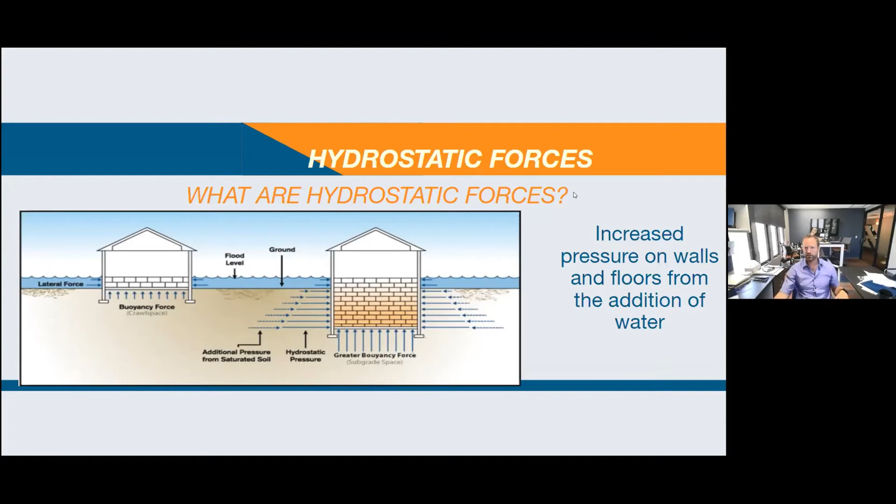All right. Another part of hydrostatic force is you've got the buoyant part of those hydrostatic forces. Buoyancy is simple. Wood floats, right? You throw wood in water, it floats. A lot of building items float. Slab doesn't float, but you get into these pier and beam homes, these elevated homes, their foundation systems are wood, right? If they're not attached properly, and they're older, hurricane straps and all those things are rusted out, who knows? You can easily have buoyancy from up underneath.

That buoyancy can create the displacement of the property. It can lift it, reset it back down. It can mess it up from one side to the other side. But that is an aspect of hydrostatic, because it's just the natural buoyancy of an object to float when it gets in that water. So again, you have a long-standing lake effect, ponding type effect, flood event that's acting on

an older home, say it's built in the 80s, and it's a pier and beam, it sits there for a lot longer. That's going to have a lot more tendency to potentially raise up, potentially come off of its foundation, just depending on how it's constructed.

But buoyant forces are the vertical pressures applied to the structure due to the vertical water pressures. Again, vertical water pressures coming up from underneath, and it occurs when the weight of the displaced water immersing the structure is greater or equivalent to the weight of the structure being displaced. And a lot of that has to do with how buoyant the actual object is. There's certain objects that are more buoyant than others. Go ahead and go to the next slide.

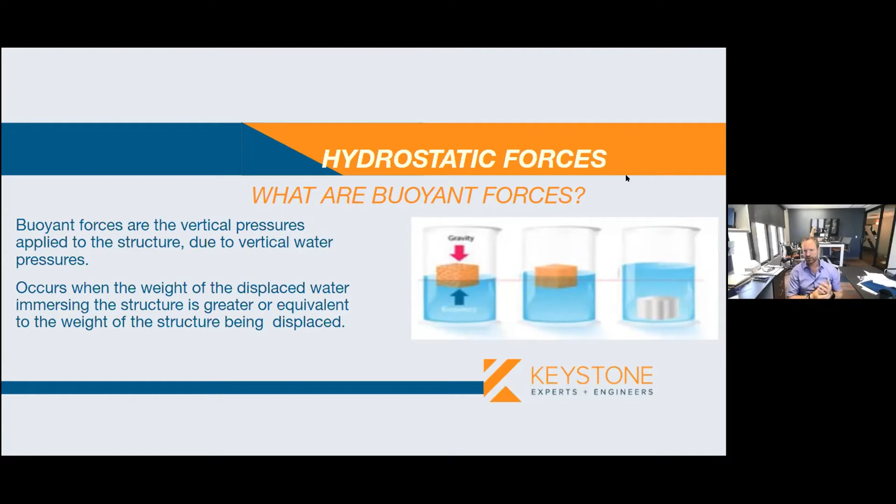So then you get into how do buoyant forces affect structures. Kind of talked about the raising houses. Well, one of the most common things you'll see is in pools. If a pool is not full and you have a flood event in the area, that pool can and will come right up out of the ground. You see this in freezing actually as well, in areas where there's a big freeze-thaw event. People drain their pool for the winter, not knowing that they're actually supposed to keep water in it all winter. That pool will come up out of the ground.

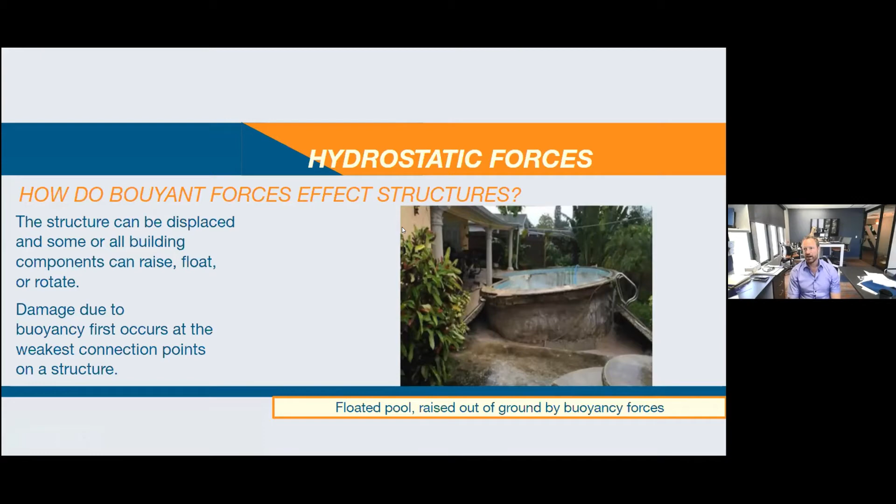We've had several assignments like that, just trying to determine the cause and the origin of, hey, why is this pool up out of the ground? But in a flood event like this, you get a big one. That pool is a big, huge fishbowl, and it's not full of water. Guess what? That thing's going to go up. But that's the same principle of what it can do to a house if the house isn't constructed and tied down properly. Next.

Little simple table here. What is water pressure? Hey, in a typical dry event, if you look down on the bottom left, you've got the water table, which is down there. And then all you have exerting on the structure is earth pressure. That's it. And you're going to have typical expansion, contraction of soils, depending on what area of the country you are in. That can be really bad to very minimal, depending on the quality of the soil, right?

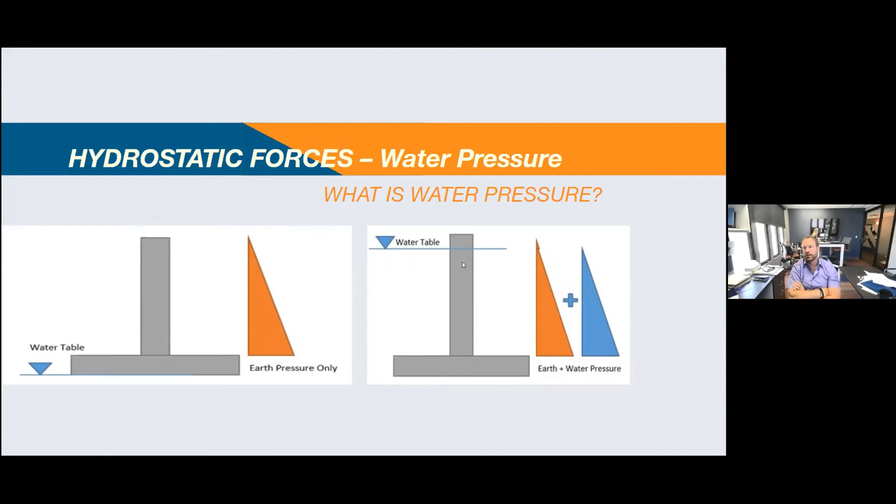And then now all of a sudden you've got this raised water table. Well, not only is the earth pressure acting on it, which is now increased, now you got the earth plus the water pressure coming on it, which is driving that whole instance up. So you could have a heaved slab in the middle of a house. This is due to that type of hydrostatic pressure acting against the slab underneath, just because you've got the combination of earth and water pressure.

Not all heaved slabs are due to just straight up earth movement or soil expansion. A lot of heaved slabs could easily be due to hydrostatic pressure, but you really got to look at it and look at all the other factors to see, hey, does this add up? Is the slab heaving enough that it adds up, or little? You put it all together, and that's what the brainiacs and the engineers are for.

They put all that stuff together. How does water pressure affect structures? Again, this is pretty common. This is what you're going to see most commonly in an event like this: you're going to have these lateral earth pressures, these lateral water pressures coming at it, and it's going to just buckle that interior wall.

This could be a subgrade thing. You see this a lot in basements. Again, you see it a lot in older homes that were constructed of CMU. They might not have been reinforced. They didn't have the rebar coming down. That's just older construction practices. They weren't designed to withstand the type of lateral pressure coming in on those walls, and so you see this a lot in basements.

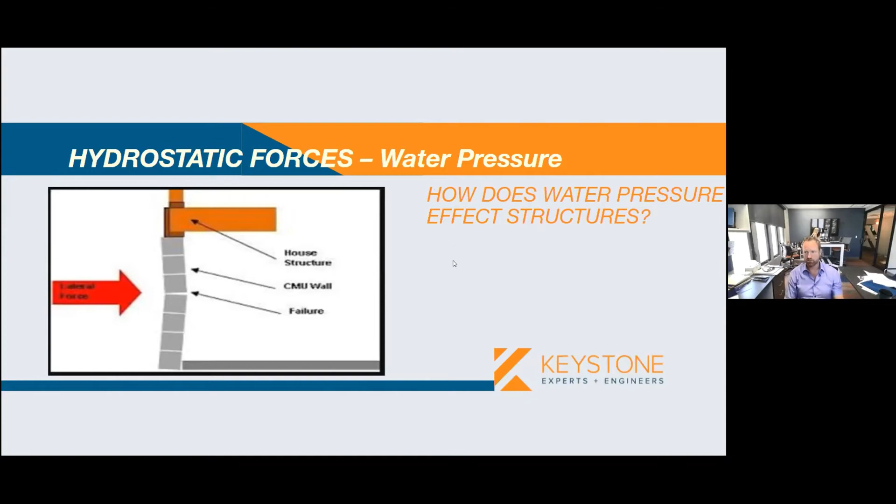You can see it in the upper floors as well. But the most common area is in a basement, because you've got all this earth pressure already acting on it, just naturally. And now all of a sudden you've got all this water, and these walls weren't meant to be retaining walls. They were meant to just hold back the earth. And now you're telling them to retain all this water as well. They buckle under pressure, boom, you're going to start to see those failures. You've seen them all the way blown out to just a simple crack. And I think we've got a couple pictures here that show that next too.

Yeah. So identifying damage: you've got walls bowed or offset inward, diagonal cracks at the wall corners, pumping water at cracks, gaps in the floors. I don't know if you guys have ever been in a flooded home in the basement, or even just a typical slab on grade home. Water is still coming up. You can see it gurgling up through the surface, depending on how quickly you got there. And that's all hydrostatic pressure coming up from the ground and from the sides.

Horizontal cracks in the field of the wall, stains on the walls beneath the cracks, upward heave of the floor slab. All of those are hydrostatic water pressure. Again, this can mess things up. The better you get, the more experience, you can tell what's older, what's newer. We get involved in stuff all the time where, hey, this crack existed before, it was already failing. Well, now you've got this big flood event and it's really failed.

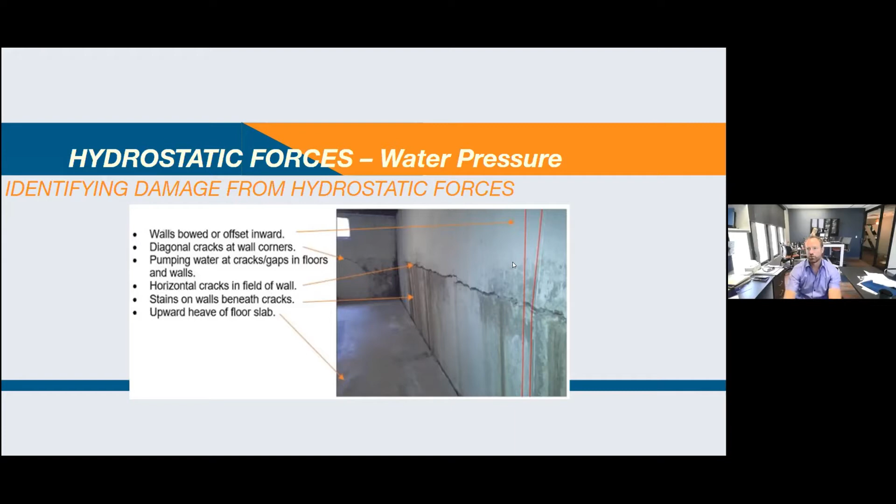And that's where it gets even more complicated, because we have to look at it and say, hey, how much of this is new? How much of this is due to the flood event specifically versus how much of this was pre-existing? So our engineers get involved in that. They can give you a pretty definitive answer on old versus new, so that you can apply the proper coverage, the proper percentage. Go ahead, Jason.

So now getting into hydrodynamic. As discussed, static is standing still, standing water. Hydrodynamic is moving water, flowing water. This is the velocity flows, the wave action, the pressure exerted on all of those things. Hydrodynamic is notoriously a lot more damaging than hydrostatic, depending on the area and the characteristics of the flood event. A river overflowing its banks, flowing really fast: hydrodynamic. A hurricane, massive waves acting against a structure: hydrodynamic. So this can create a lot more damage a lot quicker than hydrostatic does.

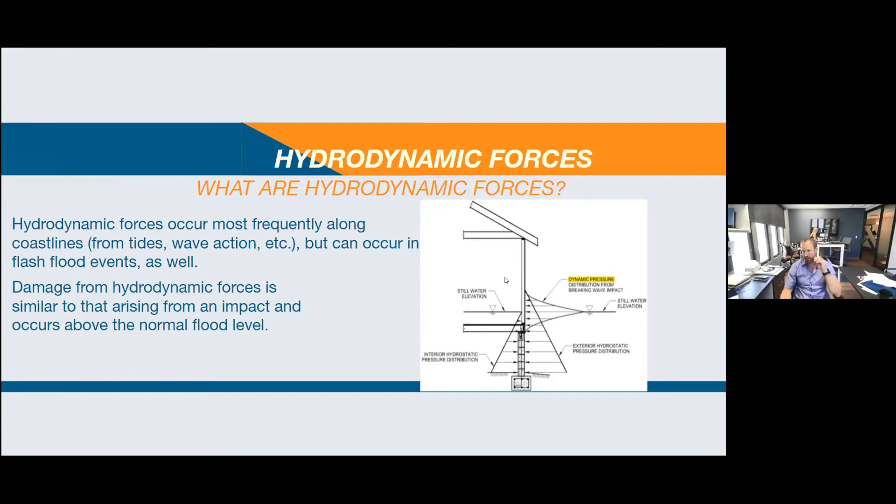I remember we worked a large event out in Boston a few years ago. We were finding ocean spray and flood damage on the third story. This is all from hydrodynamic wave action going up there. The surge was only a few feet, but the dynamic flow of the waves caused everything to go up even higher. So you've got to look at all those different factors.

Velocity flow, again, it's discussed. Velocity flow is a part of this hydrodynamic side. Velocity flow results when moving water impacts a structure. It can cause isolated impact damage from floodborne debris at or near the flood line, unless you got a big boat, and then it can be up on the roof line. Seen that too. But different from damage from hydrodynamic forces, that debris impacts the structure rather than the rapid impact of the water. Again, this is all aspects of the flood though.

Flood brings it, nice big tree, nice big boat, neighboring house, slams on another structure. That's damage from a debris impact from velocity flow. Velocity flow generally occurs during rapid flood events, flash floods, not during widespread general flooding, i.e. Hurricane Harvey. We saw very minimal hydrodynamic damage in Hurricane Harvey in Houston, right?

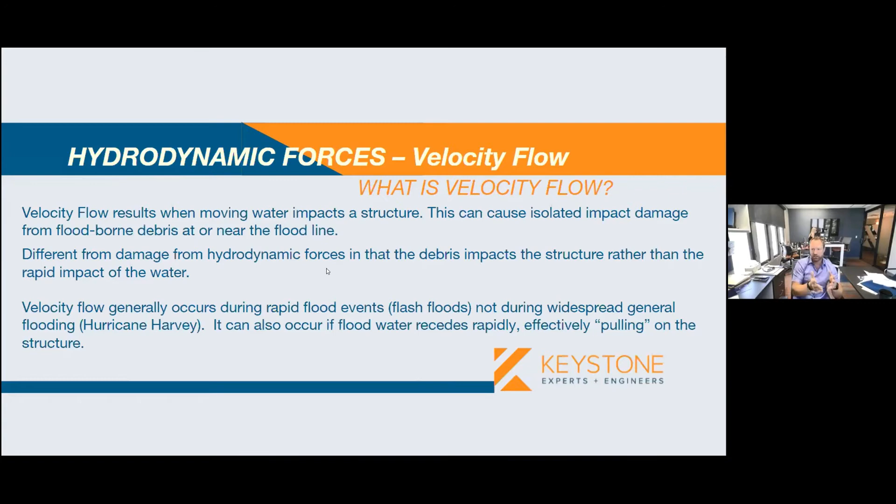Obviously, you had Port Aransas, Rockport, those areas. You had the wave action on the shorelines, undermining pillars and pilings and some slabs and things like that. But it was minimal compared to like a Hurricane Michael. But all that to say, it can also occur if floodwater recedes rapidly. How does velocity flow affect structures?

Well, the most common one is probably scouring and erosion around the foundation system. That water is rushing, it's moving, it's pulling soils with it. It hits something, water's always going to find a way around it. It hits the foundation wall, it hits the walls, it creates the turbulence, it moves the soils out of the way, it continues to erode and degrade the soil, displace the soils underneath the foundation, the pilings. Go stick your feet in the sand and watch a wave come in. That displacement of the sand around your feet is exactly what can happen in these velocity flow types of events.

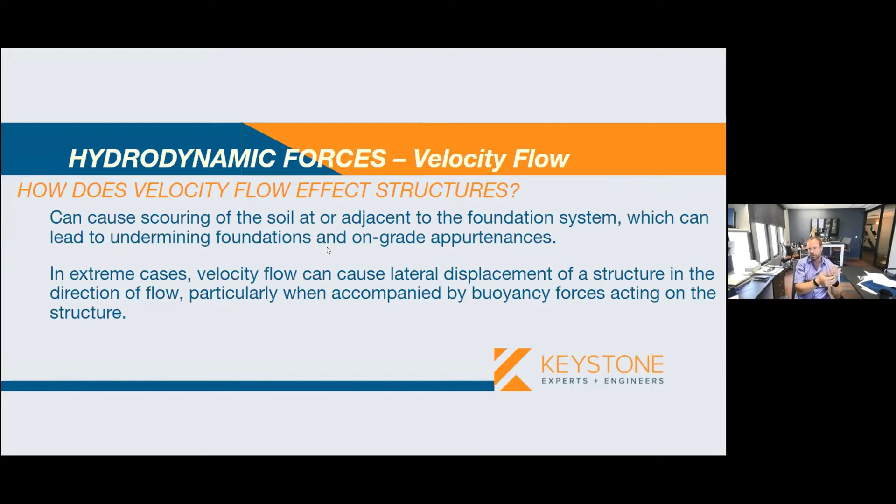In extreme cases, velocity flow can cause lateral displacement of the structure in the direction of flow, particularly when accompanied by buoyancy forces acting on the structure. So you've got this combination of, hey, it's in water, pressure's being upward, and it's being hit from velocity flow to the side. That's kind of like the double whammy. So you've got a really fast flowing flash flood event, or along a river, that's where you see true velocity flow damage, displaced houses, that kind of stuff.

And then obviously you get when the embankments are eroded out on a river, and then you got the houses that are literally just falling into these rivers because the velocity flow eroded so much of that embankment soil. And now these houses are no longer supported and they fall into the streams. So, types of damage from velocity flow, pretty obvious. Foundation piers leaning in one direction.

You got a big old house up here. It's on piers. It's fine if the waves are going underneath the house and the water's going underneath the house. Well, as soon as that water gets as high as the house, and now all of a sudden this house is acting as a retaining system or a big dam, it's not designed for that much water pressure as it gets higher and higher. So you see these houses that are literally racked and leaning off. May have not collapsed yet, may have collapsed, just totally depends. Scour of soil around foundation piers, as I was talking about earlier, racking of structures, and then structure leaning in the direction of the flow.

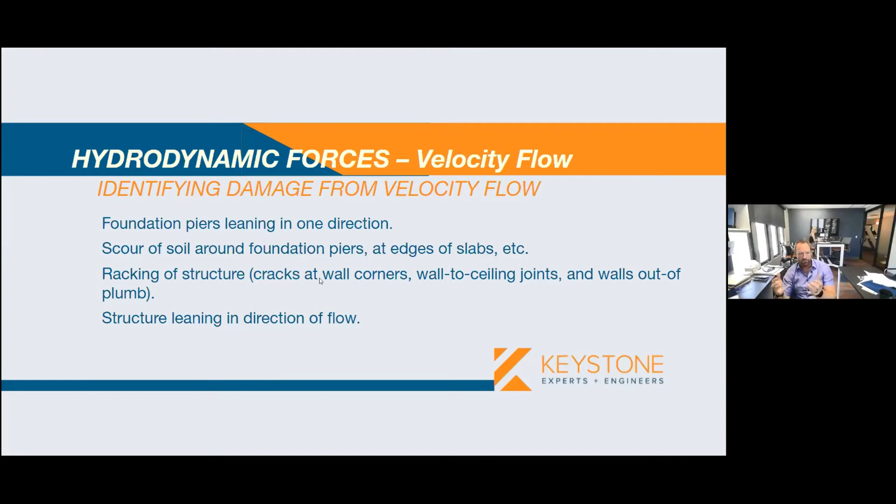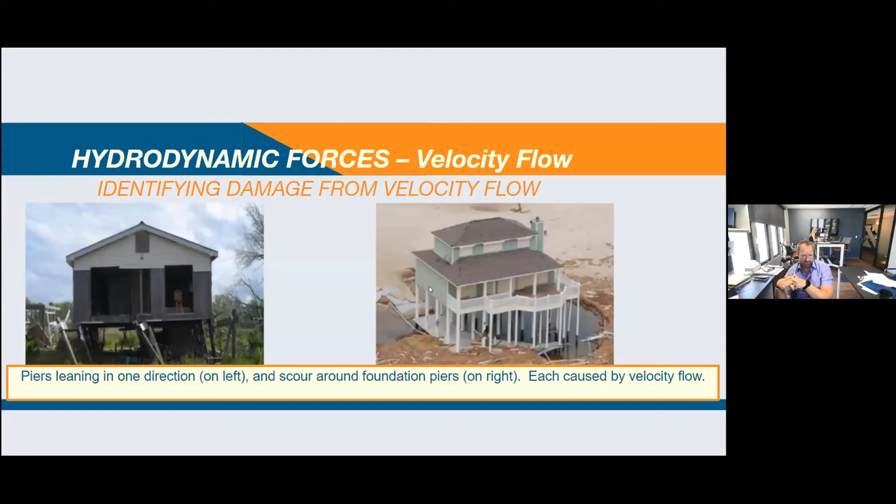Hydrodynamic forces, here's some examples. Again, you've got one house that's leaning off to the side on the left side of the screen, and then on the right, now you're looking at all this erosion, all this undermining of these piers that's supporting this house. I think that's Hurricane Michael, if I'm not mistaken, but I'm not 100% sure. You've got hydrodynamic forces. Again, that's wave action. Washes out roads, washes out streams. And there in the middle, you've got soils being washed out around the foundation. The same thing on the right.

You've got that erosion. Now all of a sudden you've got a slab that's unsupported, that can cause cracking of the slab, downward displacement of the slab. I mean, it's not being held up anymore. It really all depends on how much that slab was undermined. And then that can translate all the way back to the house. I mean, this kind of stuff, everything needs to be supported. It's construction, right? It's not supported, more damage happens.

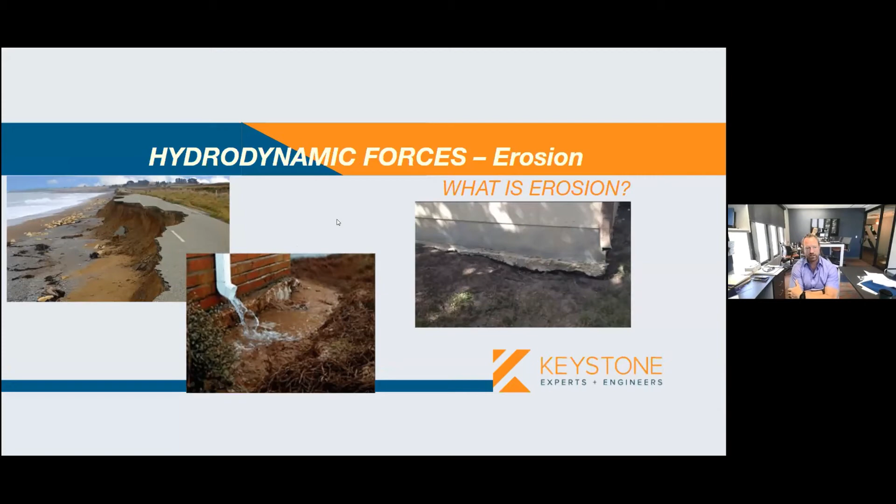Identifying it, again, impact damage to elevations facing the incoming flow of the waves, right? So you've got displaced siding facing the ocean. Pretty obvious. Impact damage across the entire elevation as opposed to localized damage. If it's one missing piece of siding, that's one thing. If it's the entire elevation of missing siding up to a certain height, it's a little bit more obvious what's going on there.

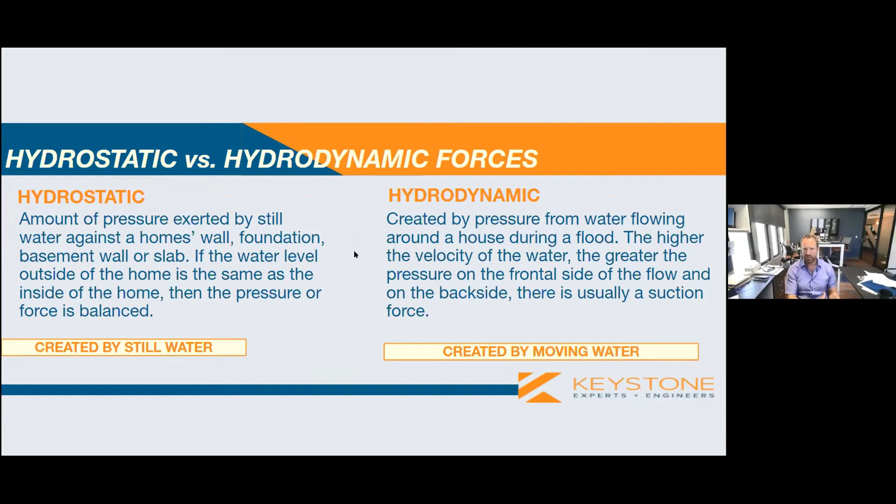Damage above the flood line, again, with that wave action going higher than the flood line. Example of something in Hurricane Katrina. So as we talked earlier, hydrostatic, created by still water, hydrodynamic, created by moving water. It's dynamic, it's moving. Static, it's standing still, it's exerting pressure. It's the slow death versus the quick death, if you want to put it in those terms.

All right, go ahead, Jason. All right, so Jason's going to take over here on soil inundation. Again, this is equally as important, guys, because this is what you'll see the most of, and it's really important to understand what's happening with soil inundation versus earth movement.

So go ahead, Jason. So soil inundation, Dan was mentioning Hurricane Harvey. There wasn't a lot of hydrodynamic. It was more soil inundation from standing flood water. So that area had water standing there and actually saturated those soils for an extended period of time. And it breaks down those soils underneath that home.

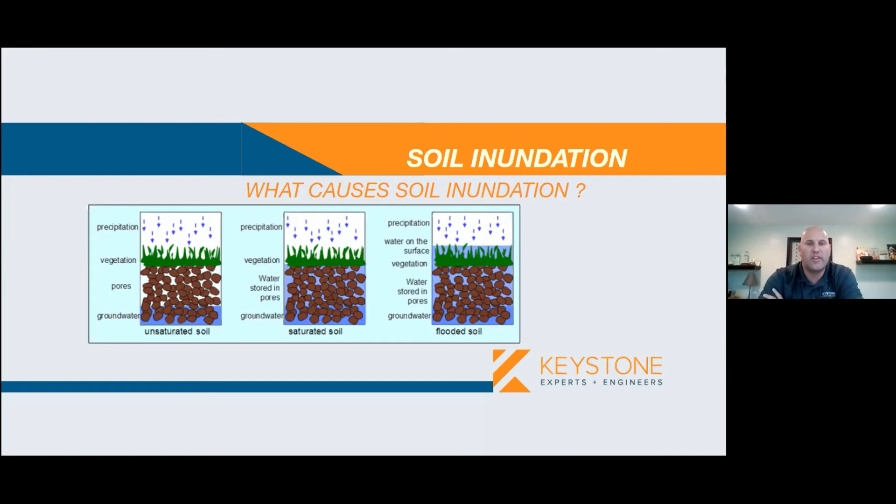And with the soils broken down like that, there is a lot of differential movement in those soils. So when that water table recedes and goes down, you're going to see potentially some movement of that house. So you're going to want to reach out to an engineering firm and determine what that subsidence was.

How does soil inundation affect structures? The voids in the soil and the architecture of the soil. Some of the soils, like Dan said, certain soils are affected differently than others, like sandy soils as opposed to loam soils. And when you bring in water to those soils, they are displaced differently. So for each individual area of the country, you're going to have different soil subsidences and movements.

And this is typical of these CMU blocks as opposed to regular reinforced concrete that holds up a lot better, but you will see it in some of the older ones as well, just based on the type of the soils underneath that are supporting them.

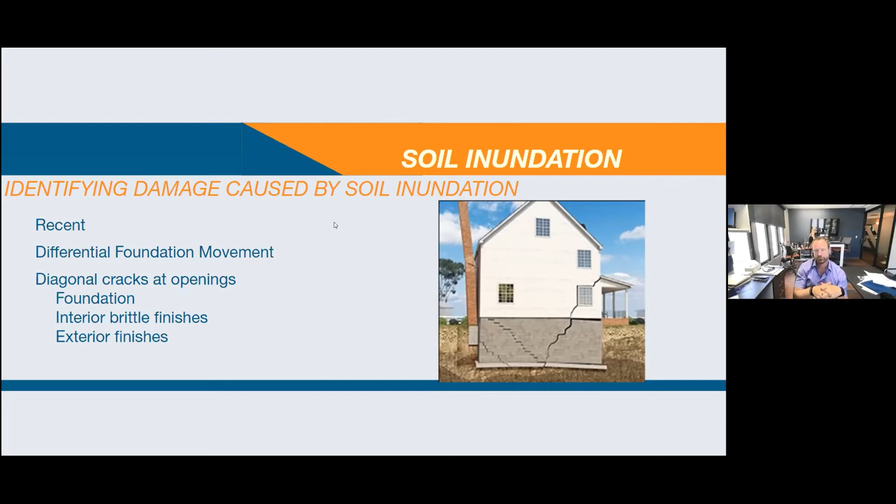Thank you, Dan. Differential foundation movement. What causes differential foundation movement? We were just talking about that. Localized soil conditions, the inundation of water, and then localized loss of supporting soil. So this is more the erosion or scouring.

The localized loss of supporting soil is the scouring, when there is a velocity flow, and it actually removes the soil from underneath the foundation elements, whether it's a slab or whether it's a pylon. It actually removes the soil, and then you could have differential foundation movement.

And then you're going to have displacement of those soils, and actually that slab could drop, and you're going to have that situation above the slab where you're going to have the stair step cracks above. So this is all coverage questions.

So when you have a situation, we don't want to get into coverage, but when you have the erosion piece as opposed to the soil consolidation, where the soils are so saturated and it dries out and you have the movement and settlement, that's where different coverage determinations come in. So we provide you with an expert report to make those determinations there.

Two completely separate coverage areas: the soil consolidation, where you have the settlement and the displacement of the soils, as opposed to the loss of the soil support, the erosion, the evacuation of the soil, and the moving of the soils, whether it's scouring or wave action or the streams running through their rivers.

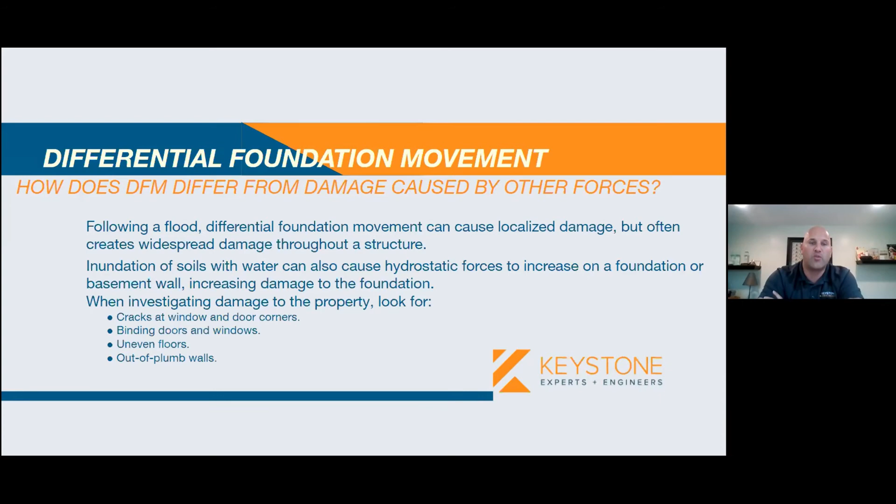Scouring, as I mentioned. Scouring is like when you remove the actual dirt and water from under the foundation elements. And that downward displacement, as I mentioned before, creates all the internal damages, all the stair step cracks, the windows not being able to open and close.

Wave action creates a lot of this. If you have the hydrodynamic forces and you have constant wave action, you'll see these forces from these waves undermine these slabs over an extended period of time.

Then you have the rivers constantly flowing around certain elements, whether it's a post or a corner, or even drainage from a gutter. If you have a downspout running next to a corner of a house, you'll have extensive erosion possibly from the constant scouring of the water moving across that certain area. When water is more turbulent and the velocity of the flow increases, the more soil and displacement you potentially could have with the downward displacement of these slabs or foundation elements.

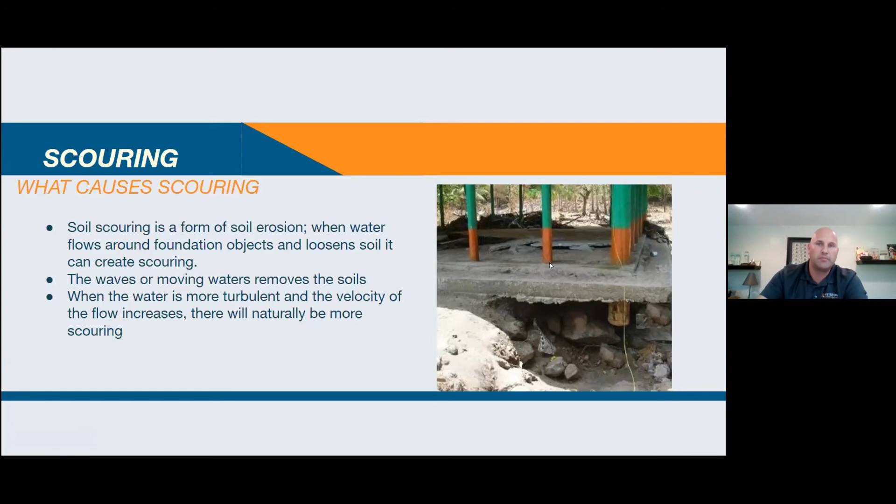How does scouring differ from differential movement? So the differential movement, as I mentioned, this is where you have the standing water there. The soils are so saturated. When the water table recedes, you're going to have that movement of that soil, as opposed to where you have the actual scouring and the erosion and the downward displacement where you have the foundation elements dropping, which causes the damage to potentially the entire home in certain situations.

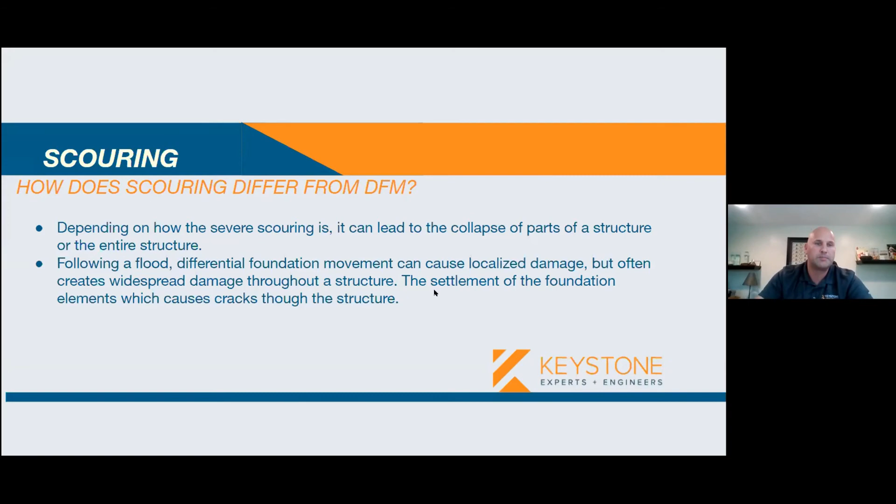Mud flow, we see mud flows. When I was working with the corporate insurance companies, we ran into mud flows typically out in California, where I've seen a lot of this, where you had the wildfires. They burned a lot of the mountainsides, the hillsides,

and then you have a heavy rainstorm, or spring flooding or rapid snow melt coming off those mountains, which creates a muddy slurry of rocks and earth and other debris running down a river, or in some cases it ran down streets, and it forces its way into homes and crushes everything in its sight. So I know FEMA has some guidance on mud flow and landslides, which I'm also going to talk about.

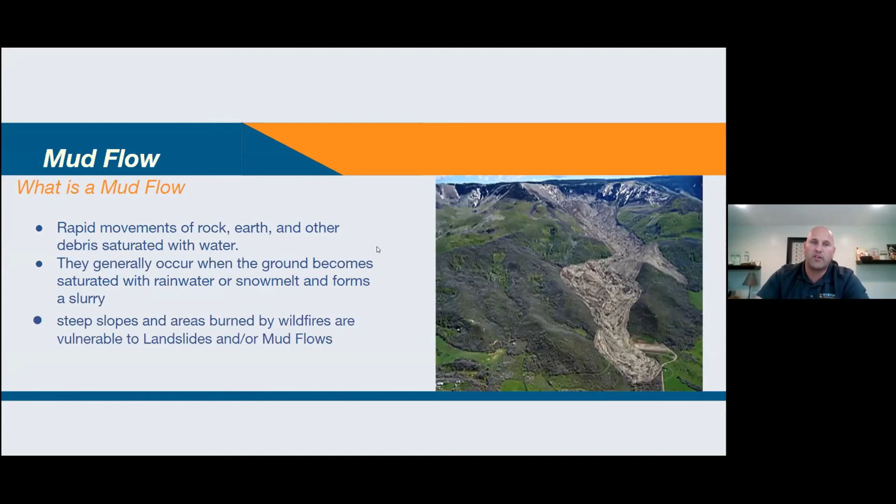A landslide is where you have a solid landmass. When you have soil inundation that's heavy, a large mass of rock or earth just collapses. And we see this a lot, like in Beverly Hills, you have homes sitting up on those cliffs, and it's not a slurry or a liquefied mud flow. It's just more of a landmass collapsing to the ground from the side of the mountain. And that's due to a lot of soil inundation of water.

So there is coverage for one and not the other. So if you're not sure whether it's a landslide or a mud flow, we could engage a geotech, and they could help us make those determinations. Yeah, and one thing on that too is, you could have a landslide that's triggered by erosion, not just the other way around. I mean, think about an embankment along a river.

It might look like a landslide, but it really might just be due to erosion. And so instead of a denial, now all of a sudden you've got coverage. So you really got to make sure you're covering all your bases on this stuff, because the ultimate end cause of this damage is what's going to determine what happens with this claim and how the policy relates to that end conclusion on those engineers' reports.

That's why it's like, oh, it was flood that did it. As we said in the beginning, that doesn't answer the question. That's why you have to get into these nuances of what aspect of the flood did it. You've got the forces, and you've got all these different factors that can work together to cause the damage, so you could have a lot of things that might look like they're contradicting each other, but they actually flow with each other, based on how it's done. So you always have to make sure you're really getting down to the bottom of it.